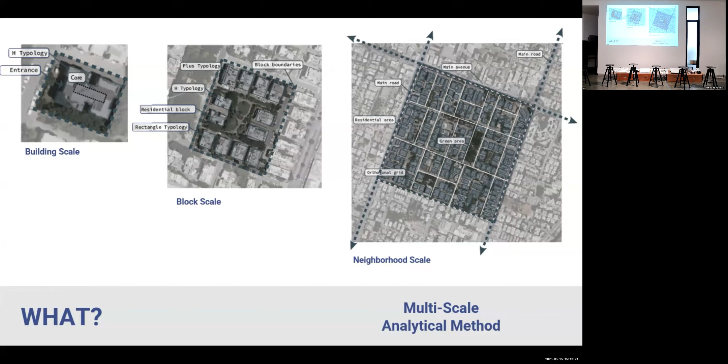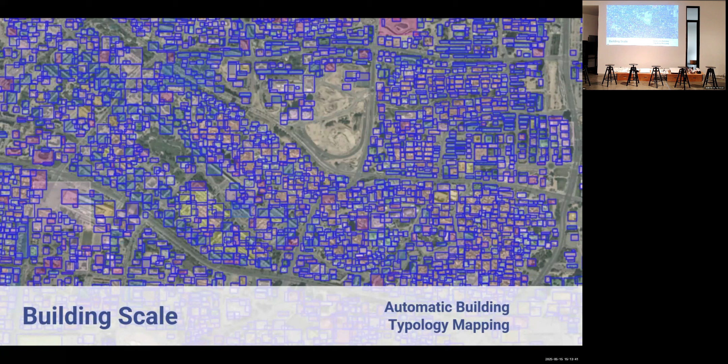Using a bottom-up perspective, in the first stage of the research we start from the building scale with the aim of using its insight for the next scale. We chose to analyze the building typology using available satellite imagery with a vision-based model, because satellite imagery is the most accessible data source for global urban analysis. We use a basic machine learning workflow, and then we developed our tagging. We tagged buildings in 8 neighborhoods in 2 different cities.

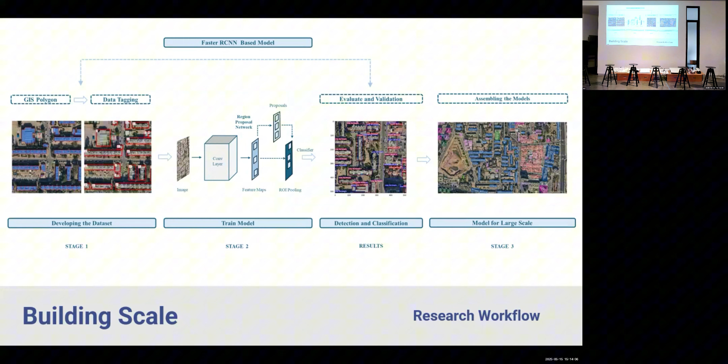Next, we chose the Faster R-CNN model due to its ability to perform detection and classification. We achieved 70% accuracy. The result was strong, especially considering the limitation of the small data set. Here we can see the model result on fully automated mapping compared to the manual mapping results. The strong similarity between the 2 maps highlights the model's high potential for automatically identifying various urban environment parameters.

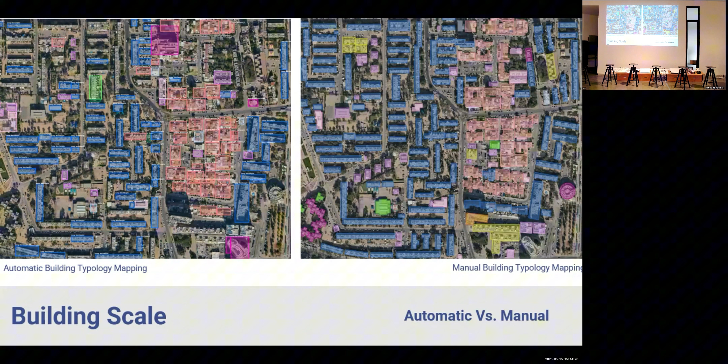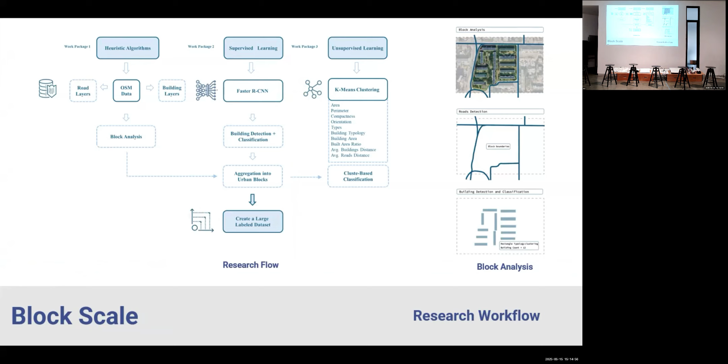Still, this is a local method. Building tagging is context specific. So in the next stage, we move to the block scale. The goal is to develop a method that can be applied in a wide variety of cities. For this purpose, we developed a framework that combines 3 methods: heuristic algorithms, supervised learning based on insights from the building scale, and unsupervised learning that analyzes large amounts of block information and performs clustering.

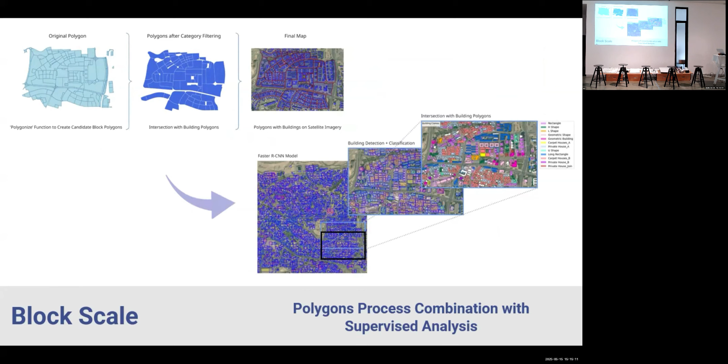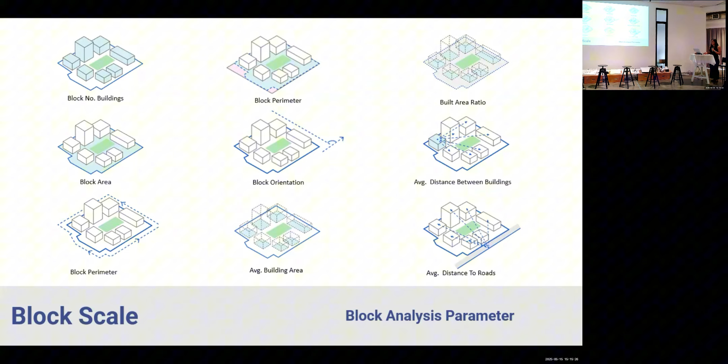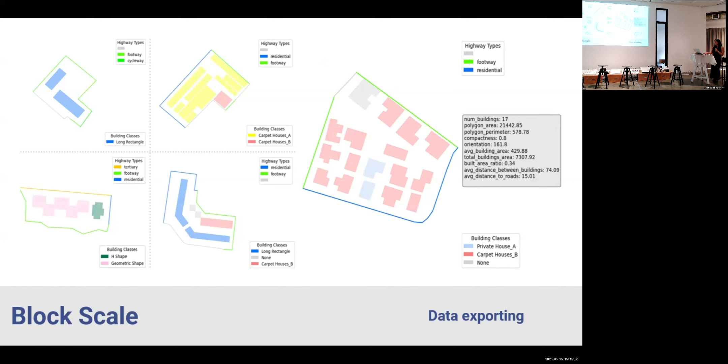For block extraction, we generate polygons based on filtering categories, such as road type and number of buildings, using open data from OpenStreetMap. Then, for each polygon, we analyze the building typology it contains. Next, we apply heuristic algorithms to analyze various block parameters automatically, such as block number of buildings, block area, average distance between buildings, average distance to the road, etc. And now for each block, we have all the information, like road types, building typology, and all other criteria.

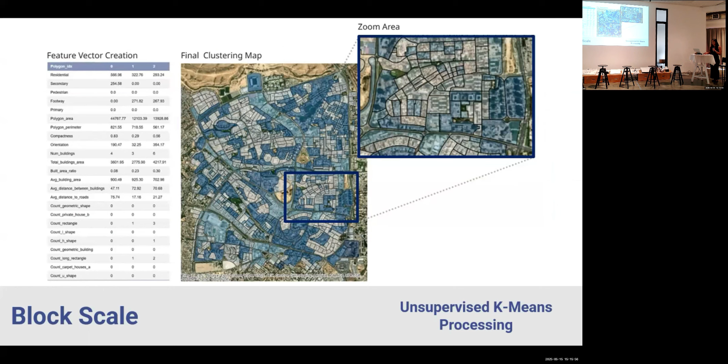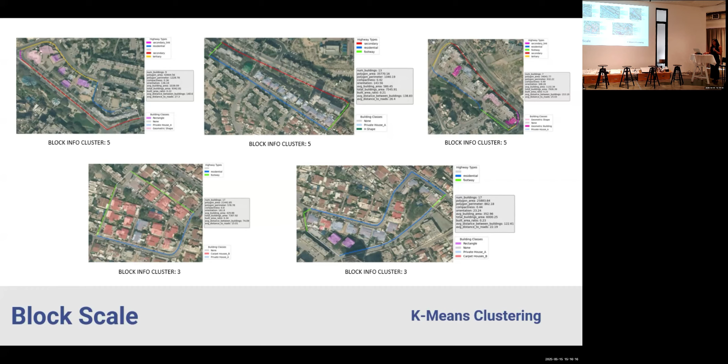Then we perform data analysis and processing, check each parameter distribution, create a normal distribution, and examine the relationship between parameters. Next, we took all this information to our unsupervised k-means model, and this is our final clustering map. If we zoom in on each block, we can see the classification of cluster number 5 at the top and cluster number 3 at the bottom. We see that in each cluster, there is similarity in the building and road type and also in the structure. And actually, this is the current state of the research right now.

In terms of research limitations, we are dealing with generalization issues, specifically in the supervised learning method, because every city in the world has diverse criteria, and we hope to solve it by developing a self-supervised method. This research contribution has the potential to empower real-time, complex, and comprehensive urban analysis for better decision-making, and to generate volumes of urban data in underdeveloped areas.

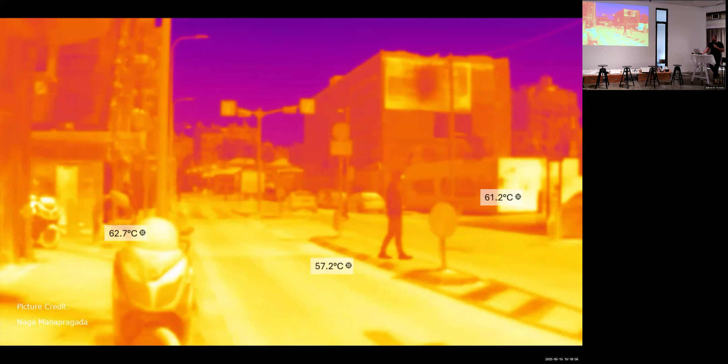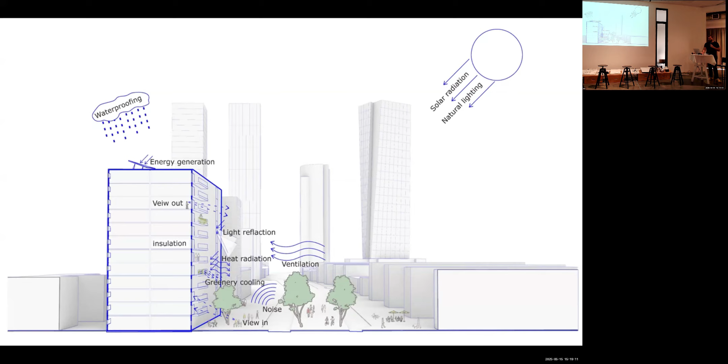The building envelope, walls, roof, facade, is where architecture meets the environment. It controls how heat, light, air, and wind move in and out, shaping our indoor comfort, but it doesn't stop there. It also reflects and radiates heat and light back into the surroundings. Its impact can be divided into three main areas. First, the indoor environment. Second, how the envelope affects energy balance and carbon emission. And third, the influence it has on the outdoor comfort in the surrounding space. All of those impacts are shaped by key design variables of the envelope: its composition, morphology, and materiality.

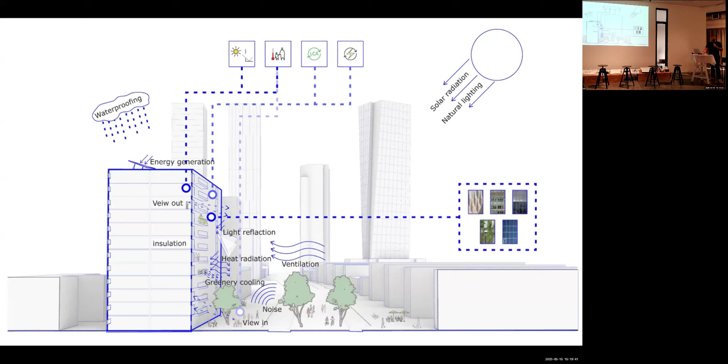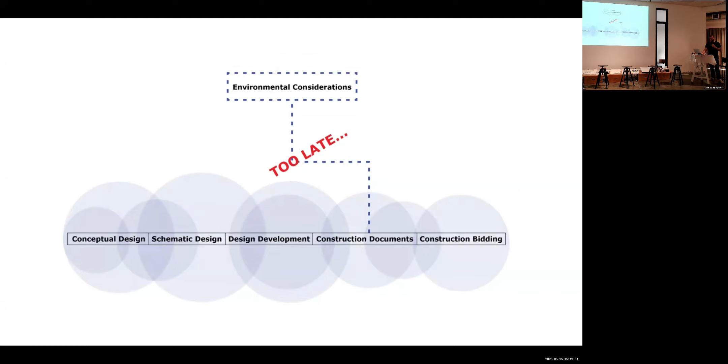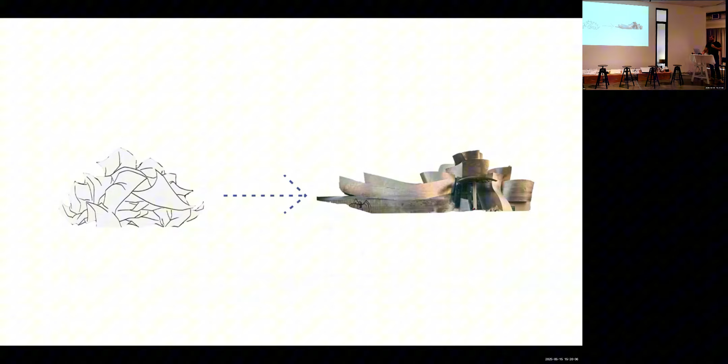In today's architecture workflow, environmental consideration often comes at the end. By then, most of the envelope's key features have already been defined. If we could address the environmental aspects of the envelope early in the design process, we could avoid creating problems that are much harder to fix later. But today, evaluating those factors is still too computationally intensive to do at this stage. That's the core question of my research. How can we evaluate and compare building envelopes early in the process, across multiple environmental dimensions, without slowing down design?

That's where new technology comes in. By using machine learning, we can enable fast predictions that support better decisions right when they matter the most. To generate those fast predictions, we'll train a three-dimensional convolutional neural network. But before we can do that, we first need to prepare the training data set. The data set will begin with generating voxel geometry. It will include a mix of building typologies, urban scenarios, and 5 different envelope types: opaque, transparent with shading, greenery, and PV. This diversity is essential for creating a broad data set and avoiding overfitting.

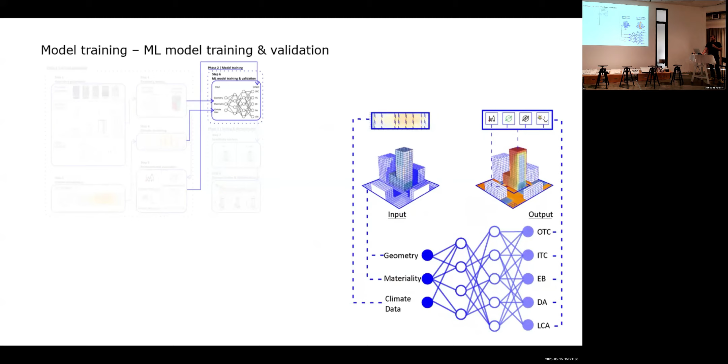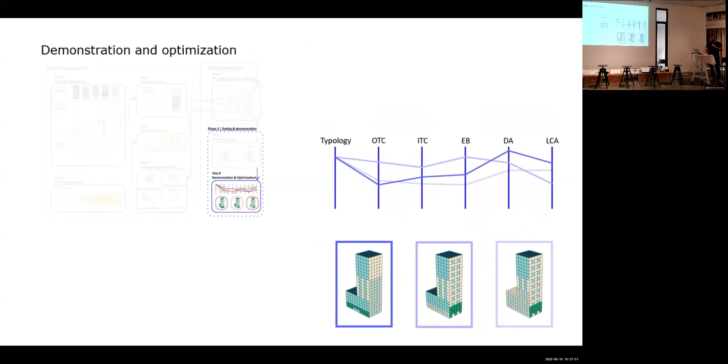After generating the geometry, we'll use geometry encoding and envelope clustering to reduce the computational intensity. Next, we'll perform an environmental evaluation integrating the geometry with climate data to simulate how different envelope components affect the performance. Those simulations will cover indoor and outdoor thermal comfort, operational energy use, embodied carbon, and daylight conditions. Once the dataset is complete, the fully processed envelope geometry will serve as the input, and the simulated environmental results will be used as the output. Finally, the results will be processed and optimized using a multi-objective optimization algorithm to identify the Pareto front, highlighting the best trade-off between competing performance goals.

Okay, I'm missing a slide, but sorry. Take that out from my time. Okay. You have one more minute. It's fine. That's so nice. Yeah.

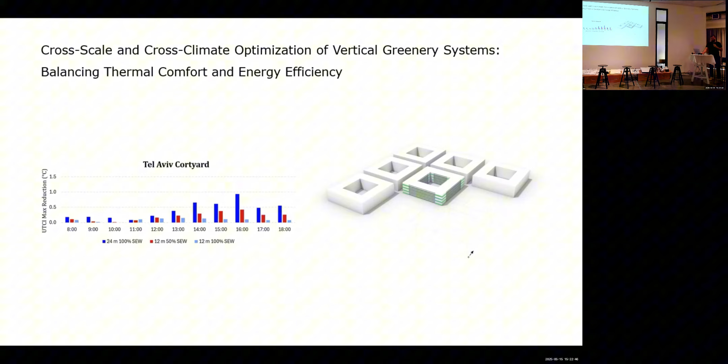Okay. To emphasize the importance of understanding the complex environmental impact of the building envelope within specific urban and climatic contexts, especially at the early design stages, we conducted a preliminary study. It assessed how different levels of greenery cover affect both energy performance and outdoor thermal comfort. Interestingly, we found that in certain urban scenarios within the Tel Aviv climate, partial implementation of greenery actually performs better than full cover.

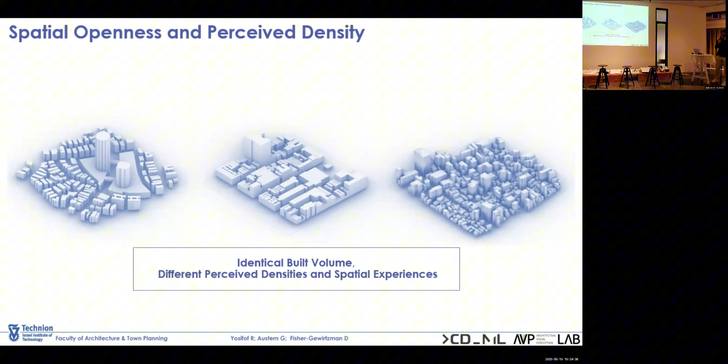networks. So here we can see 3 different morphologies, all have the same exact built volume, but they generate different spatial experiences and have different perceived densities. At the AVP lab, we developed 3D simulation models that analyze visibility and spatial qualities across different scales, which help decision-making in regard to spatial openness and perceived density. Today, I'll talk about the USOI, or Urban Spatial Openness Index. It's a ray casting model that uses rays in Grasshopper and Rhino to evaluate the spatial openness in analysis points across the city.

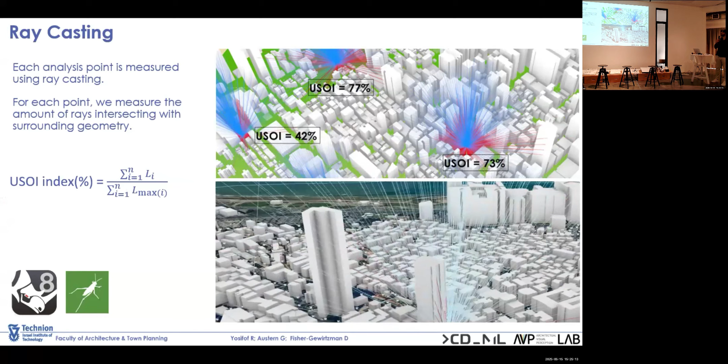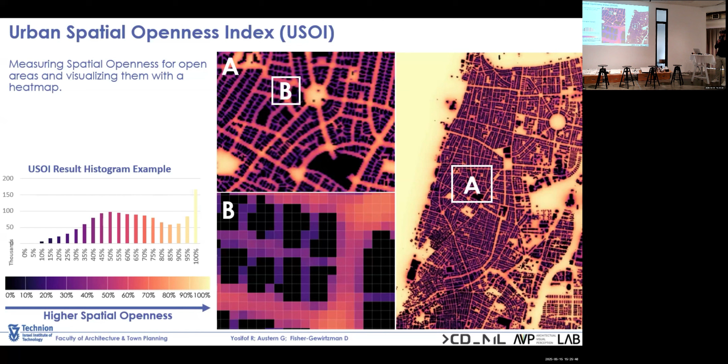Its score for each viewpoint is defined as the accumulated length of line of sight of all sample points. The results of the USOI are then visualized as heat maps, where brighter color indicates higher spatial openness and lower perceived density. Every point unoccupied by a building is measured, such as streets, parks, and courtyards. Each pixel of the image represents a 5 by 5 meter area and is assigned a value based on the USOI measurements. In Tel Aviv alone, there are around 1 million analysis points, which is a problem because in such a scale, raycasting analysis is computationally intensive.

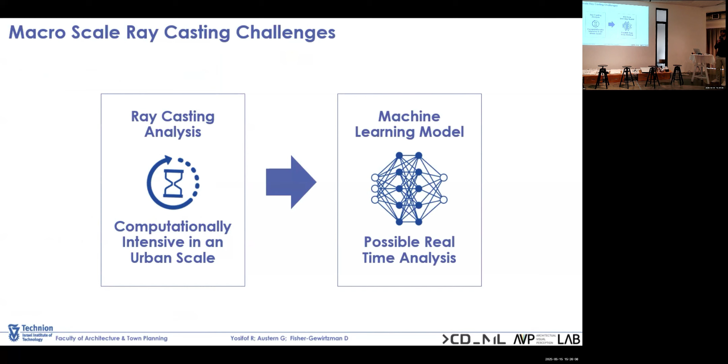So we hoped to utilize a machine learning model to allow possible real-time analysis in such scale. So we used a U-Net convolutional neural network. The U-Net is a proven model widely used for image segmentation tasks. The idea was simple: to take building height maps, which are easily generated from 3D models, and compare them to the USOI measurements, which we did in our script. So the idea was to take those images and train the model. And once the model is trained, we hoped that we would be able to input a height map, which again is very easily generated, and output the spatial openness map of the region.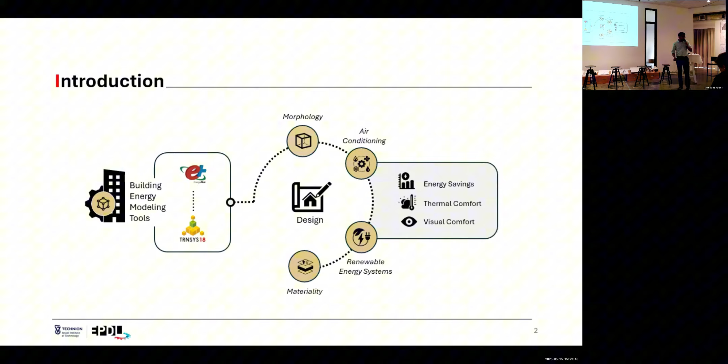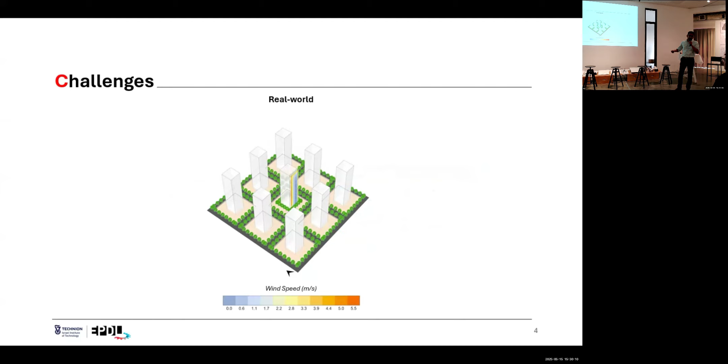Hello everyone. Today I'll be presenting the need and role of urban microclimate meta models, the so-called surrogate models, for next generation building energy modeling. So we all know that building energy modeling tools are being largely employed for making informed design decisions. And these design decisions are important for promoting energy savings without compromising on thermal and visual comfort. Notably, these insights are questionable in the urban context, but why? When we look at this hypothetical urban block model with wind speed of 5 meters per second coming from the south direction, usually we will notice low wind speeds on the south facade of the central building, right? However, if you look at the building energy modeling tools, that is not accounted.

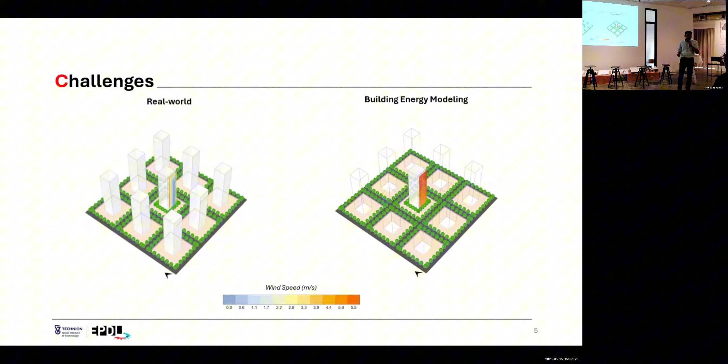Why? Basically, they consider the contextual urban elements, whether a building or a tree, without accounting for their impact on microclimate. They are just shading objects. So several such less known assumptions are made by a lot of building energy modeling tools. So we have accumulated them and we have a paper. If you're interested, you can go through it. Now the question is, can we consider the microclimate impacts?

From a theoretical perspective, we have CFD-based urban microclimate modeling tools, which can actually generate place-specific microclimate data and supply it to the building energy modeling tools. However, we have two major limitations. The first major limitation is that ENVI-met kind of models can generate this data and building energy modeling tools will accept them, but not the other way around. That means the heat data from the building energy modeling tools is not accepted by ENVI-met.

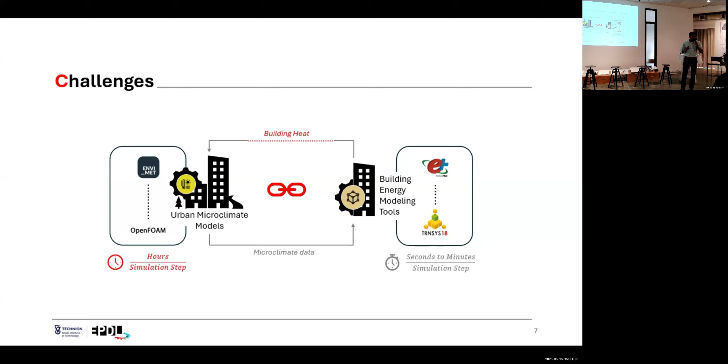The second major problem with all the CFD models is the time. If your building energy modeling tools take seconds to minutes per simulation step, CFD-based models take hours for one step of simulation. So to overcome this limitation, we have used the simulation data from urban microclimate models and then deep learning expertise to generate this urban microclimate meta model.

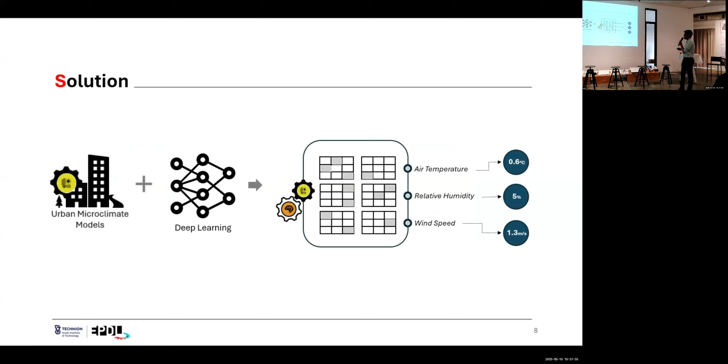So the model which we just created for Tel Aviv has shown a very good performance. For air temperature, an error of almost 0.6 degrees Celsius. For relative humidity, it's only 5%, and wind speed 1.3 meters per second.

So how does this meta model work? For any given block model that you generate, you can create the model using Ladybug tools. You can create the energy model, and we have this custom component that generates a Python API that enables the data exchange between the building energy model, Honeybee, and the meta model. Then we have another set of components which generate the predictors for the specific block model you have given.

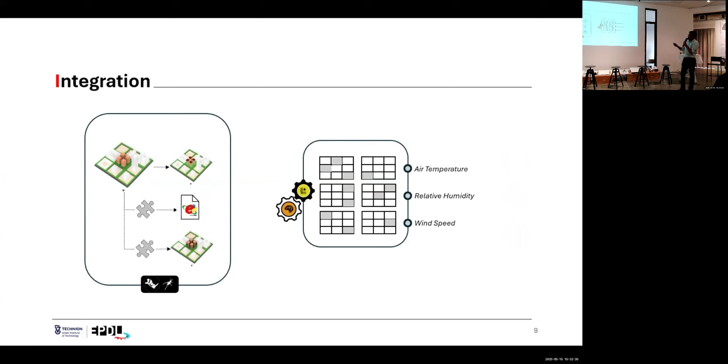Now, once you start the simulation, the data from the building energy modeling tools, like surface temperature, forcing climate data, which is taken from the EPW file, and the predictors data are supplied to the meta model. From the meta model, at each step, the data goes back, specifically the face-specific microclimate data.

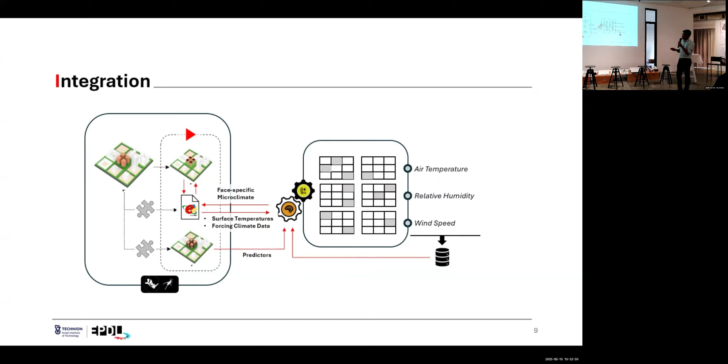Beyond generating the urban microclimate meta model and integrated building energy modeling workflow, we have created an advanced workflow that enables us to get representative urban block models and typical climate days so that we can generate a lot of diverse data that can help us train machine learning models.

The major USP of this project is the predictors that can characterize the complex urban geometry for every point, and that can be decoded by the custom deep learning architecture we have created. Although we would like to demonstrate these things, we are waiting for our publication to go ahead. And thank you so much.

You have done that. Very good. I want to welcome our guests from the University of Cincinnati. Feel free to join us and sit. They will be with us, I guess, for the next 20 minutes. So we are in the middle of a PechaKucha session of research on urban environmental intelligence. Very interesting, and relevant for Cincinnati as well, I guess. You are welcome to join and sit, please. There are spaces here.

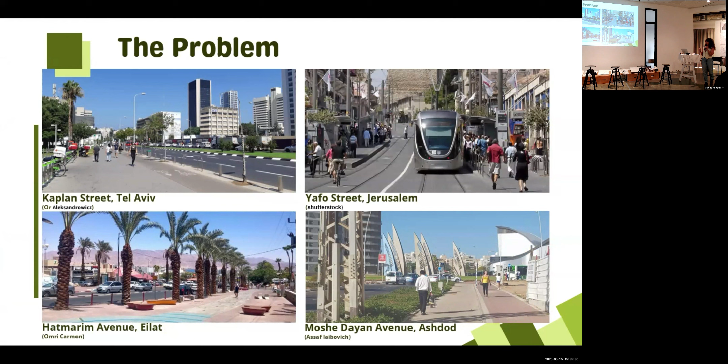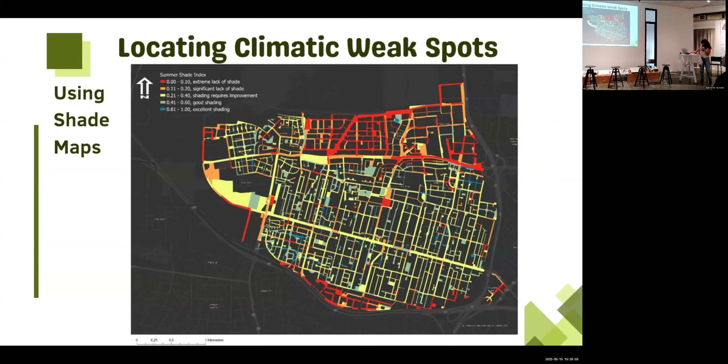As can be seen here, main streets in big cities in Israel all show the same urban design failure. Streets were built without shade in mind, particularly tree shade. To fix this, we first need to locate the climatic weak spots. Shade maps, which were developed in our lab, show us where shade is missing and help cities identify the streets most exposed to heat. But here is the catch. While shade maps highlight shading conditions, they still don't tell us how many trees are actually missing. This is the knowledge gap I am trying to fill.

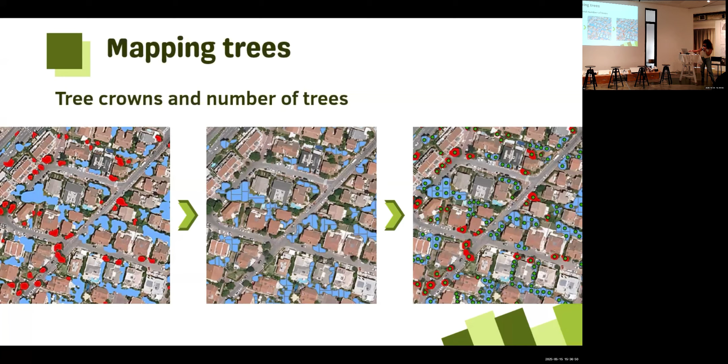The analysis of this kind of mapping showed me that different cities have different tree crown areas, and we need to take that into consideration. We need to tailor our approach to each city's reality. To do that, we proposed two city-tailored quantification methods: a normative method based on tree crown diameter, and an evidence-based method using actual street tree densities in well-shaded streets.

While the first method is easier to calculate, it doesn't take into consideration the shading coming from buildings, and therefore can possibly cause a higher estimation of the number of trees needed compared to the second method. In the normative method, we defined a design preference for tree crown overlap based on an average tree crown diameter and two rows of trees, one on each side of the street, to calculate the number of trees needed.

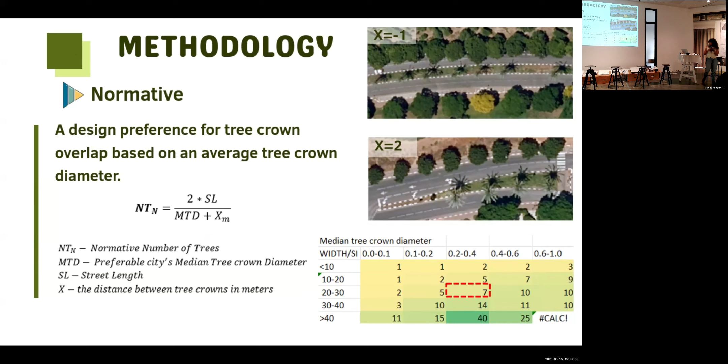In the evidence-based method, we are using correlation between street shade index, street widths, and street tree densities to estimate the actual street tree densities of well-shaded streets and use that to calculate the number of trees.

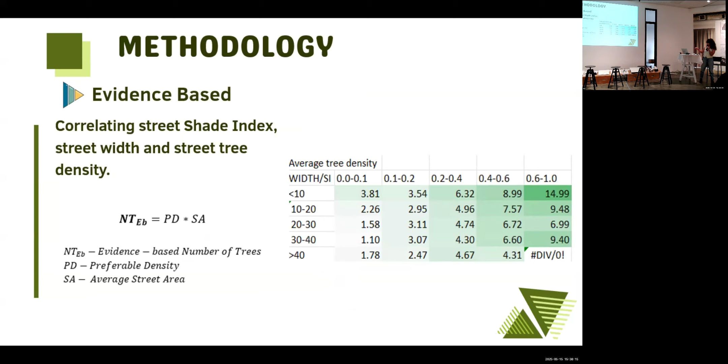As can be seen from our results, choosing different calculation methods leads to very different estimations of the number of trees needed to make a city well-shaded. As we assumed, the first method, based on tree crown diameter and different overlapping distances between tree crowns, has a higher estimation of the number of trees in streets.

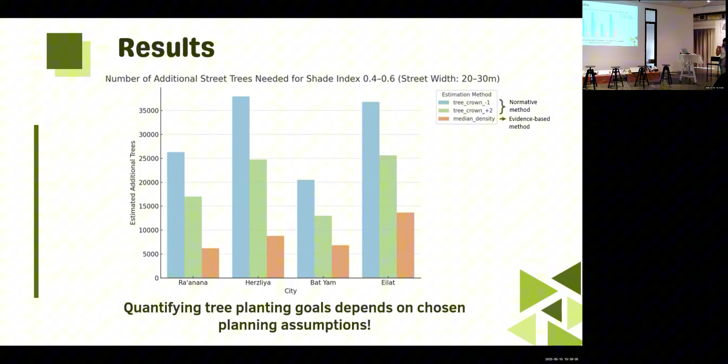However, estimating higher shade levels for the second method using street tree densities can lead to more correlated, more aligned results between the two methods, highlighting the sensitivity of our results to different chosen planning assumptions and preferences.

Ultimately, our goal is to develop a digital tool that will enable planners to define where shade is missing, to calculate how many trees are needed to fix the problem, and to set planting priorities, not only from planning preferences or assumptions, but also taking into account urban politics aspects like financial resources, feasibility, planting space, and social vulnerability.

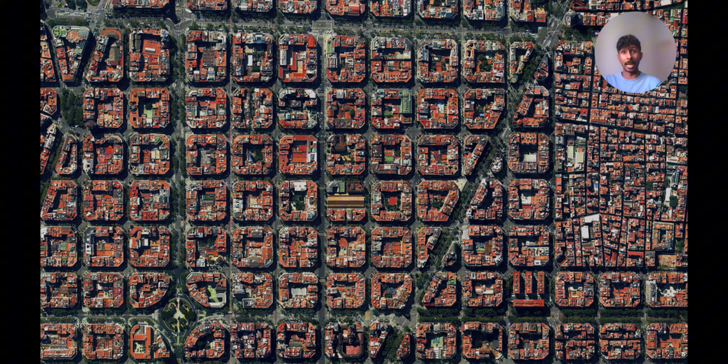To me, urban environmental intelligence means rethinking our basic understanding of the abiotic environment around us. Sun, soil, water, air, not just as data, but as part of an eco-logic that informs every design decision we make. Sustainability has long focused on human-centered goals, reducing energy, improving comfort, curating design aesthetics. But real environmental intelligence must also include the living organisms that we share our cities with. This is where multi-species design adds value.

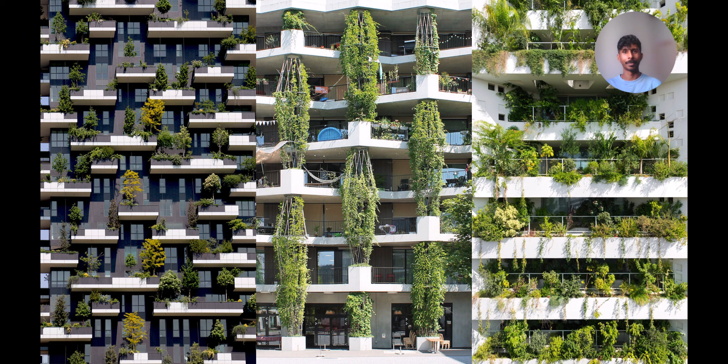For example, plants already support our urban systems. They regulate thermal conditions, they improve air quality, and by understanding and leveraging their biological properties, we can design architecture that invites more mutual multi-species interactions. Plant functional traits give us a common language. Traits like rooting depth and shade tolerance allow us to link plant species to environmental conditions. This lets us reimagine green infrastructure as ecologically informed and not just visually green.

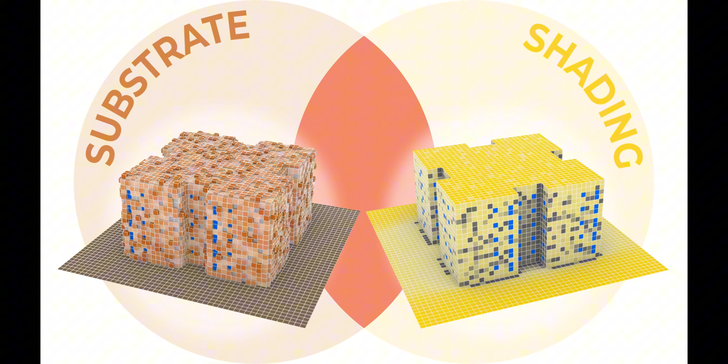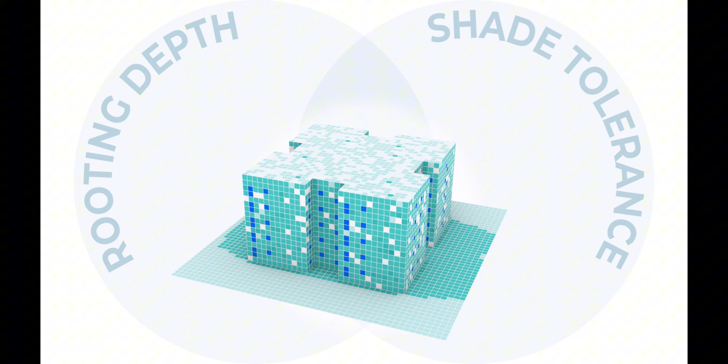We already have the capabilities to simulate environmental data, such as soil distribution and shading conditions. But these tools often provide insights on how we could improve our lives. While important, this perspective is insufficient. Plant functional traits allow us to go beyond anthropocentric approaches. We can use them to approximate which areas on building geometries meet the abiotic needs of specific plants, and this makes the design process more inclusive of other than human species.

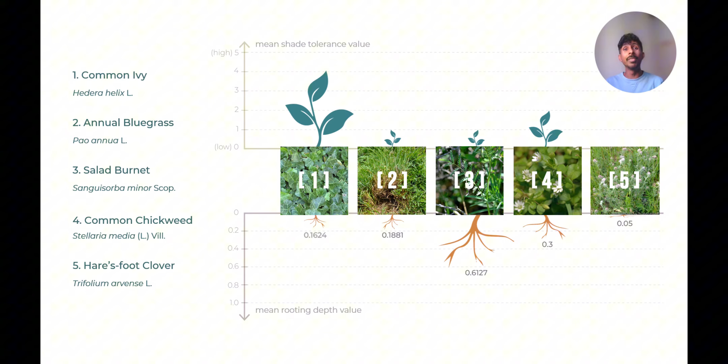This trait-based method allows for intelligent plant selection and distribution, tailored not just to climatic information, but to site or project-specific conditions. It makes ecological data actionable in the early design stages. From here, we can generate multi-species performance indicators. These are measures that help evaluate how a building's morphology could support ecological interactions. These indicators provide spatial insights that guide better design decision-making.

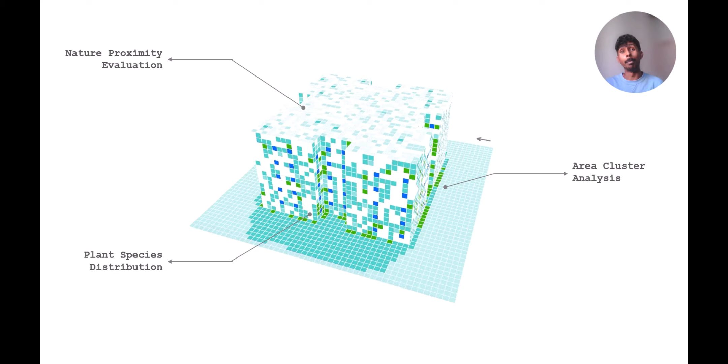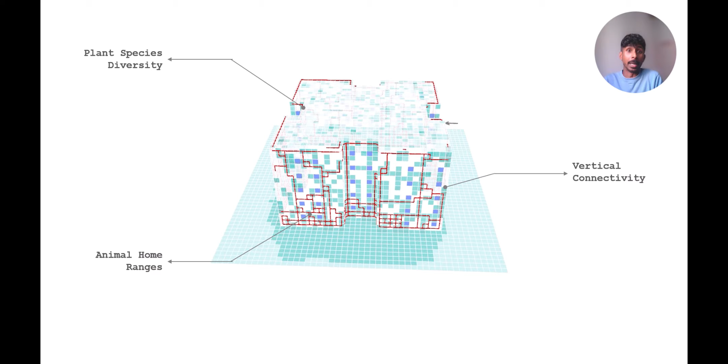As microclimatic conditions vary across facades, spatially explicit indicators like proximity or area clustering help us refine geometries that improve ecological outcomes. Small shifts in design decisions could potentially support biodiversity. More importantly, we can develop interdisciplinary collaborative processes with ecologists. Together, we can develop proxies like estimating how many plant species a building might support, or mapping vertical corridors that help connect fragmented urban habitats.

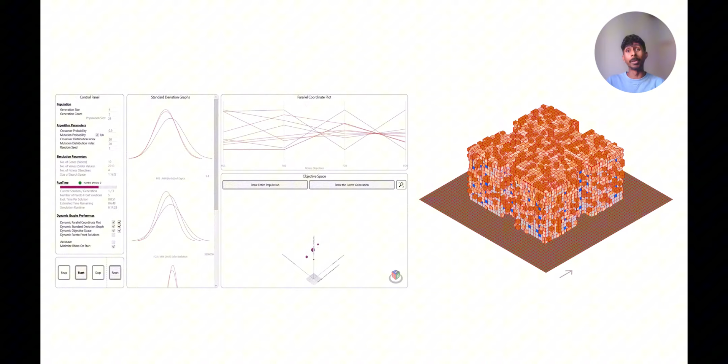Using parametric tools, such as the one developed in my research, we can embed these indicators into computational design workflows and allow for dynamic and iterative optimization processes that also capture ecological performance. Combined with our designer's intuition, these tools can support early-stage decisions driven by ecological intelligence, helping us prioritize both humans and other than human stakeholders in each design alternative.

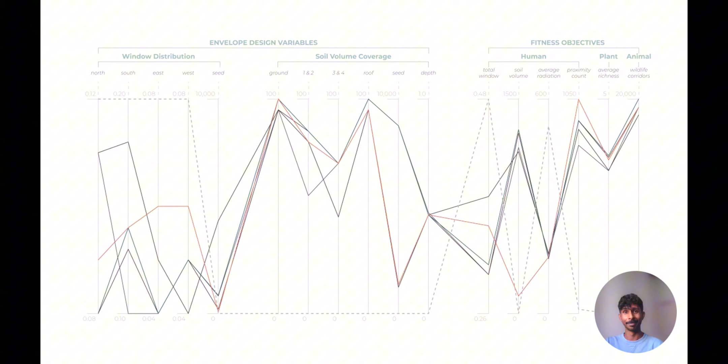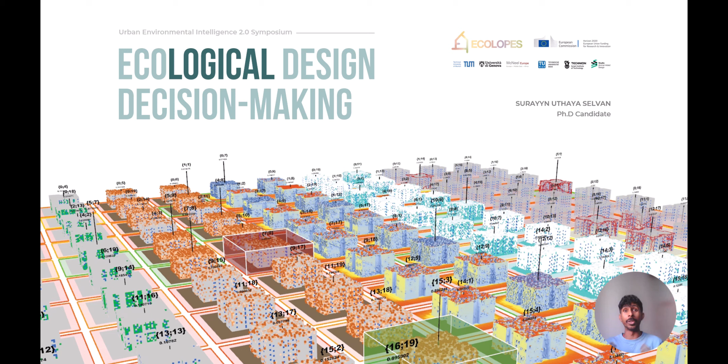Urban environmental intelligence means redefining existing design processes as an ecological collaboration. It's not just about sustainability, it's ensuring that we can coexist meaningfully with nature, even in our densest urban spaces.